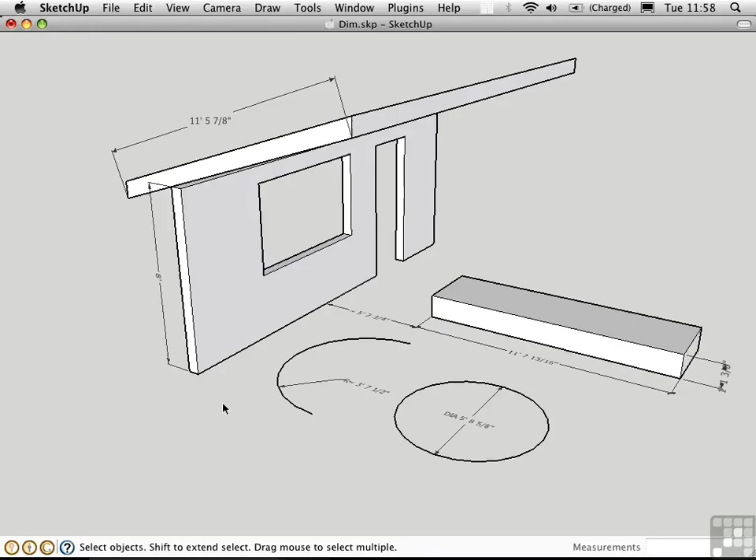With my shortcuts, T refers to the tape measure, Option T is screen text, and Control T is 3D text. Press Option T to activate the screen text tool, and you'll see that the cursor changes. I'll click on this edge to refer to that, and then I'll click again over here to set down the

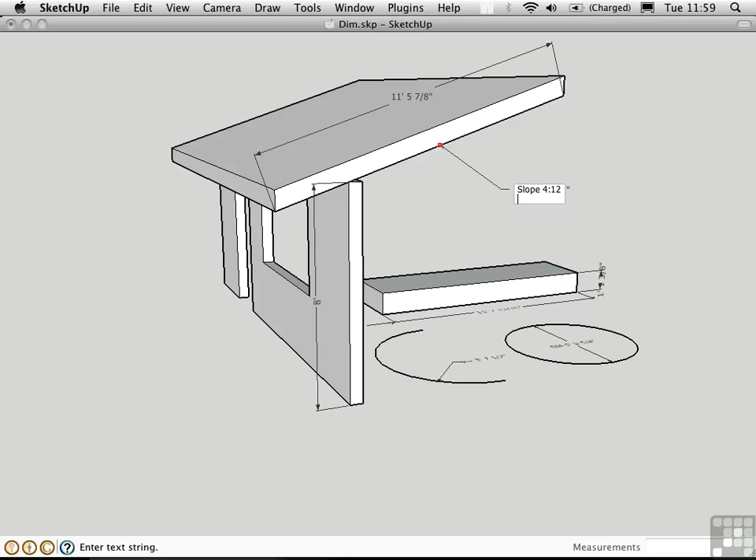leader. It suggests a dimension, perhaps of the length of this edge, but I'm just going to type in slope 4:12 to refer to the fact that this is a rise of 4 inches and a run of 12 inches. Click off to the side rather than pressing return. If you press return, you can enter another line of text, which is not my current intention. I'll go back. If I click off to the side, I complete that, and then I move on to the

next leader. You can make a leader that has multiple arrowheads by clicking another point, and then clicking down here very carefully at this point. And then I can put in a space, no text, just a space, and that will allow me to put in the actual leader line without any text. If you press escape, you'll actually cancel the command. So using a space is kind of a trick to allow you to put in multiple leaders.

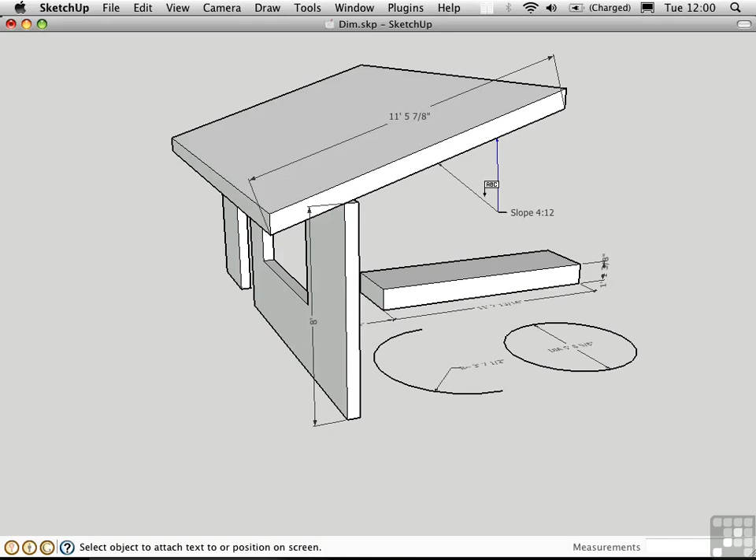But this doesn't work that well actually, because if you orbit, you'll see that the leaders are actually not in the same place. They only line up in one orientation. Let's say I want to maintain this and print this out as a drawing. What I should do now is create a scene that saves this location.

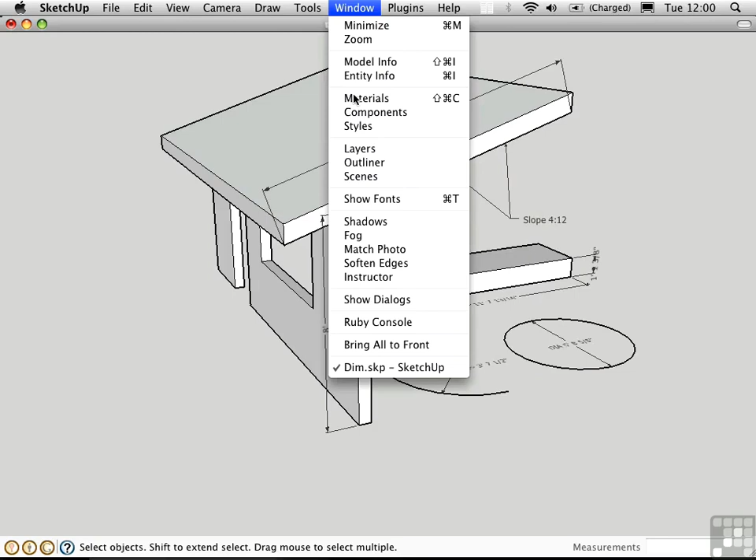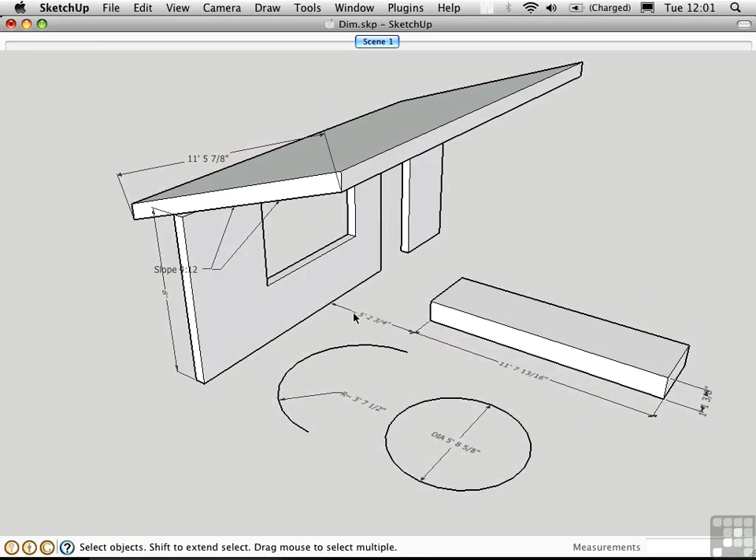I'll go to the Window menu and open the Scenes window, and I'll just have everything selected here and click plus. This will create a scene which I have access to at the top here. I can then orbit to some other orientation, click the button, and I'll go right back to that position. So this is good in Scene 1, but when I'm working in another orientation, I don't really want to see these two leaders. So what you need to do here is create some layers.

I'll go to the Layers palette, and I've already made a dim layer. I'd like to select all the dimensions and place them on that layer. A quick way of doing that is to open Model Info and utilize this button that selects all the dimensions. I'll close Model Info. Then I'll go into Entity Info by pressing Command I. Here I'll change the layer of the selection to dim.

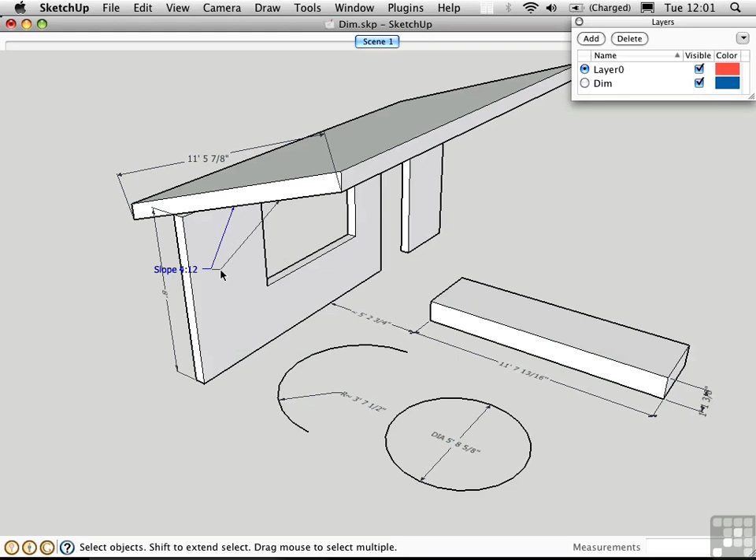So all of those dimensions are on that layer, but this is not. I need to select this manually, hold down Shift and get that, go into Entity Info and change that to Layer Dim as well. Now I can turn off Layer Dim and I don't see any of my dimensions or screen text. I can save this as a scene,

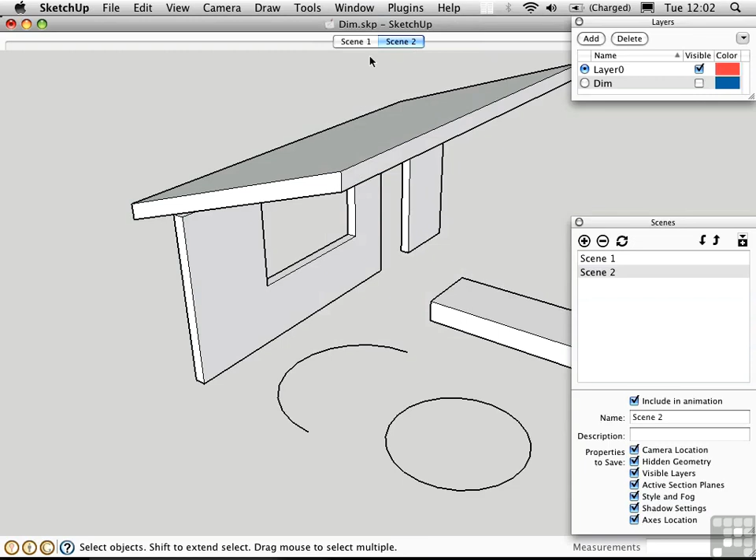Scene 2. So now I can go between Scene 1, where I have dimensions and everything's lined up, and Scene 2 where I'm working. Quite a flexible system when you use screen text and dimensions in conjunction with scenes and layers. You can also create text without a leader. Let me just go back to Scene 1.

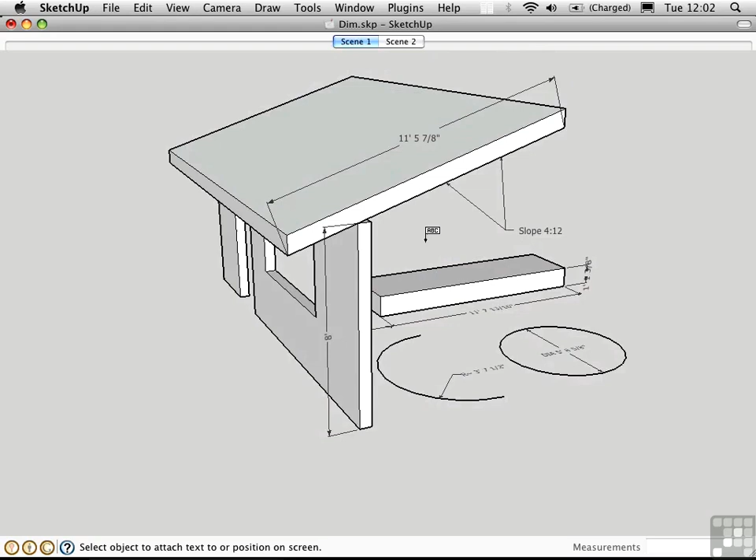I'll press Option T to activate the screen text tool. And here, I'll just click a point off to the side, not referring to any geometry. SketchUp is smart enough to realize that I'm not pointing to anything, so I must just want to type in some text. Here I can type in dimensioning, return, tutorial, and then I'll click off to the side to complete

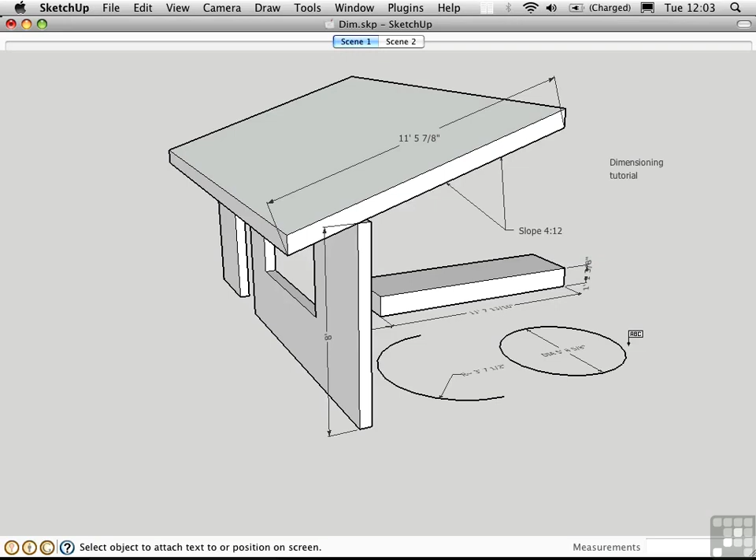the command. As the name suggests, screen text is glued to the screen, and it remains there no matter how I navigate. I can select it and move it. So screen text is great basically for identifying the drawing that you're working in and just putting it over on the side. Another way of doing this is with a watermark, which is something that I'll talk more about when we get into styles.